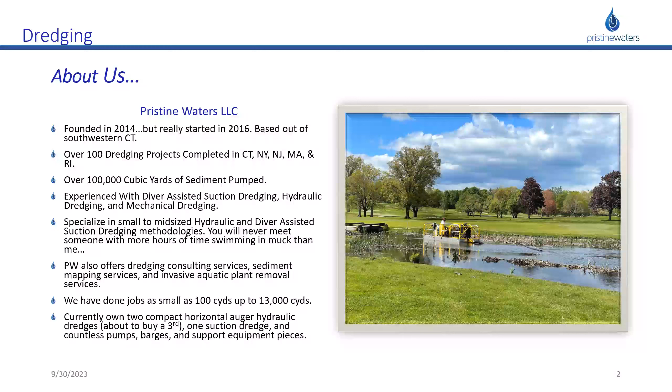One of the first things that people ask when they call to inquire about dredging is how expensive that service is going to be, and ultimately the answer is always the same, which is that we cannot possibly tell you without information, and generally speaking, without seeing the body of water we're being asked to dredge. Some of the components that go into determining the proper methodology come down to things like, what type of sediment are we talking about? Is it sand, or is it organic material, decaying plant matter, leaves, algae, so on and so forth?

Other things that come up in this process: is the sediment tainted? That will change the disposal cost, and again, the methodology by which we dredge it. We generally don't send our divers into toxic environments for obvious reasons. In situations like that, we would steer you towards hydraulic dredging. Other questions are things like, how far do we have to move the sediment once it comes out of the water? Is there ample staging space around the area that's being dredged? And if not, where is that area? How accessible is the pond or lake to get equipment to?

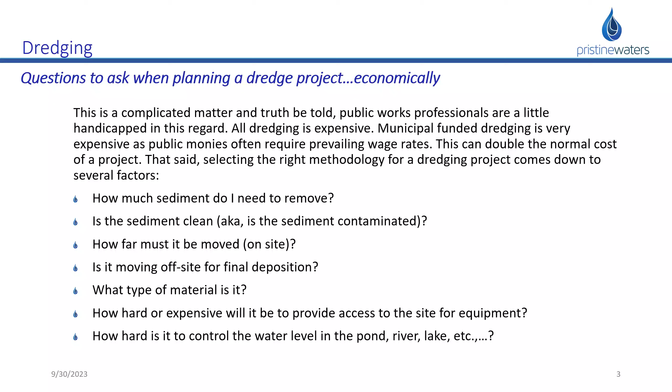So the idea of access is really important when you're looking at what kind of dredging is going to be done. And then finally, how easy is it to control the water level in the body of water you're looking to dredge? These items all contribute substantially to the cost of a dredging project.

So dredging, there's really three types of dredging primarily. There's mechanical dredging, which is kind of the old school excavator in a pond, scooping out sediment, shovel by shovel, and putting it on the ground, and then that material drying and being loaded up into a truck and driven away. That's something that's still done and is still appropriate for certain types of dredging projects.

Again, access is a big limiter, but beyond that, the other two methodologies that we're going to talk about briefly are less effective in dealing with consolidated materials like dense sand or big chunky rock. Those kinds of things are still best left to an excavator.

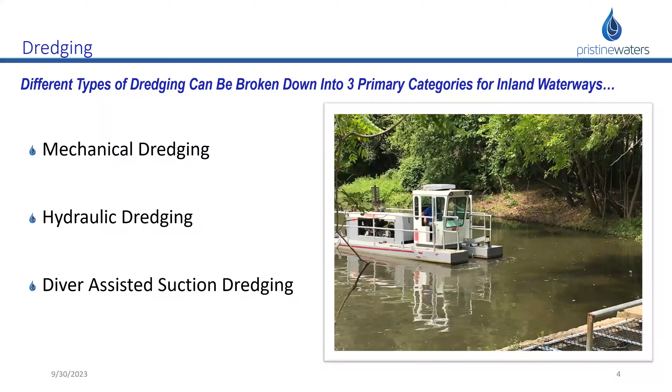In the picture you see there is one of the dredges that we've used, although not in a couple of years. We actually no longer have this dredge in our fleet, but that's an example of a horizontal auger dredge being operated with a pond being completely full of water. So mechanical dredging, I already explained.

Hydraulic dredging is essentially a steel catamaran. A hydraulic dredge, or at least a horizontal auger hydraulic dredge, is a steel catamaran with a boom that goes down and an auger head at the end. It agitates the sediment that's laying at the bottom of the lake and mixes it with water inside of a shroud.

Right behind that is a big pump, and that pump is sucking what's called a slurry, that mixture of water and sediment, out through the pump, through the boom that is being used to lower the auger head, and then into a pipeline that carries all of the sediment suspended in the water back to shore.

Similarly, diver-assisted suction dredging is essentially the same basic idea, except it's done by hand with divers who are supplied air from a topside air compressor, so they can go down and hand excavate sediment.

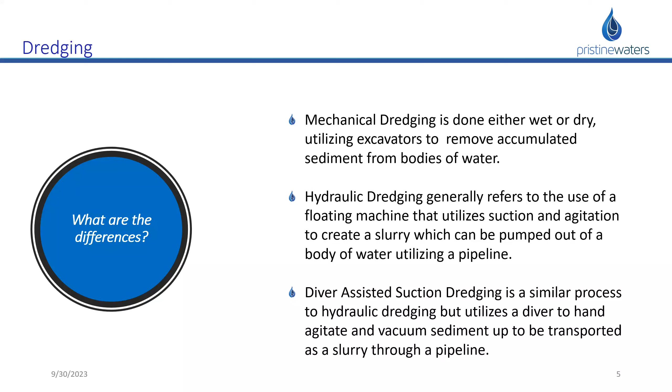So this is about mechanical dredging. It's really very effective on small bodies of water that are kind of self-contained. Any place where you have good access from around the perimeter of the pond, or even a lakefront, if there's access to get a machine down that's substantial enough to do the work that needs to be done, mechanical dredging is still a very viable option.

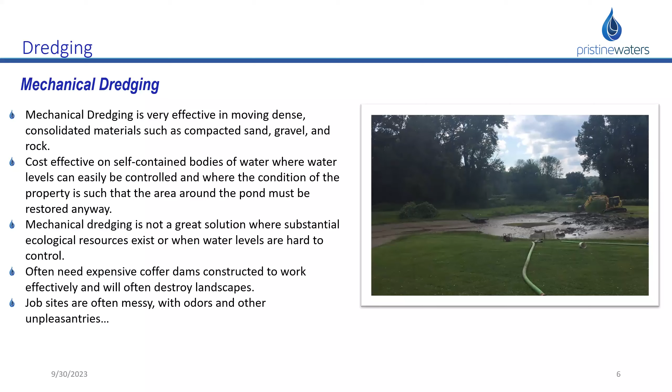Going back to hydraulic dredging, it is super effective in moving soft and moderately compacted material. So that's going to encompass the vast bulk of the sediments most lakes have at the bottom in the Northeast. It's not absolutely true all the time.

Sometimes you have heavy sand loads, and sometimes you can have clay, which is also more challenging to dredge with a hydraulic dredge. But even those two types of sediment can be dredged using a hydraulic dredge. It's just not nearly as efficient in doing so.

From a cost perspective, hydraulic dredging tends to be very effective and very cost effective when you start getting up into the thousands of cubic yards of material. In the hundreds, I think you're probably better off looking at mechanical dredging or diver-assisted suction dredging.

But when you get to a certain volume that justifies the cost of moving the equipment and placing the equipment in the lake and so on and so forth, and the setup that's required in connecting the pipeline and the geotextile tubes, it starts to become a more cost-effective option. It's good at preserving habitat, merely because you're not sucking all of the water that these organisms depend on out of a pond or a lake.

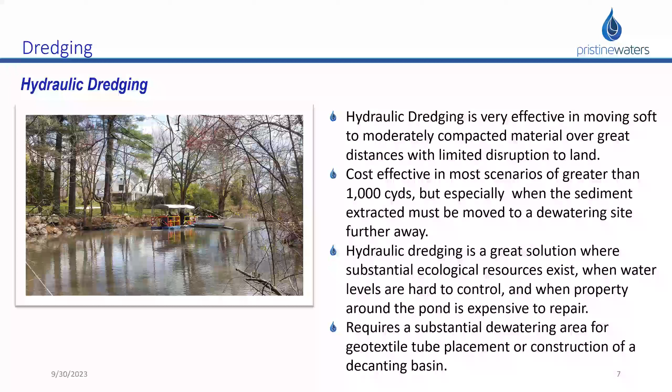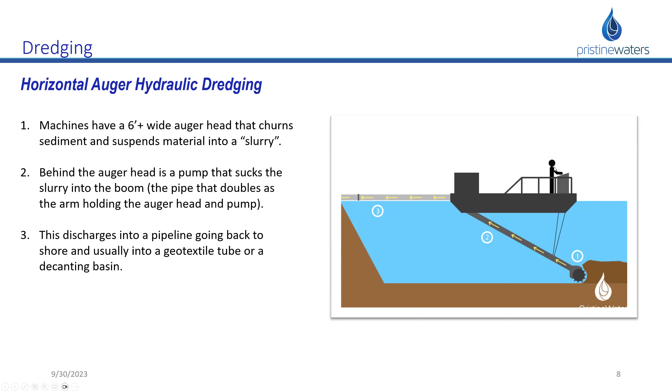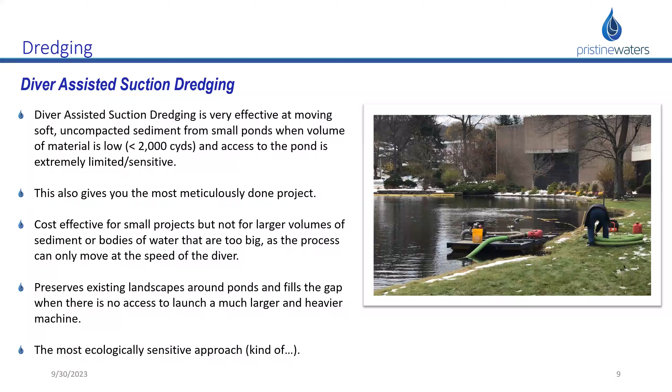So this is a cross section of what diver-assisted suction dredging actually is. So here we have the pumping barge. We have a diver with a hose with a nozzle at the end, swimming up to a wall of organic sediment. And essentially, this was part of an animation that I showed at the last meeting that I attended with you guys. But essentially, the diver's taking chunks of that sediment, that organic muck, out of the water column and just kind of proceeding through. And it's kind of a game of underwater Pac-Man, if you will.

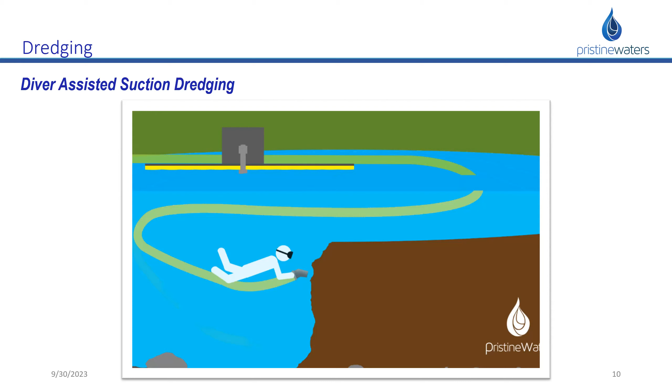So I've mentioned dewatering a couple times. Dewatering from a mechanical dredging perspective is as simple as scooping up the material, turning the excavator around, placing it on land, somewhere for the water to run off and the sediment to dry. When we do it hydraulically or with diver-assisted suction dredging, we use what's called a geotextile tube. I'll have more details on that, but this is very typical of what the dewatering area on a given project might look like.

So one of the requirements with a geotextile tube is that it's placed on flat land. And when I say flat, I mean very flat, because as you can see, these are tubes. And they can potentially roll and or shift with all that water in there, and sediment kind of moving around. If you want to try to picture a toy water snake from when you were a child, these things do like to shift. So having them on flat ground is very important. But then underneath the geotextile tubes is typically a liner. In this case, it's a 6 millimeter reinforced polyethylene liner.

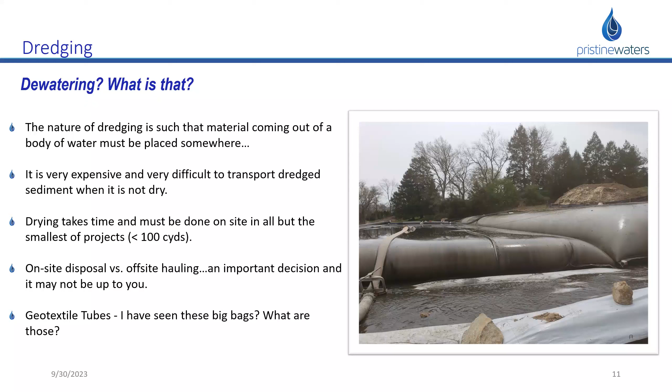The tubes can be sized in custom sizes, circumferences or widths. This is a detail of what the cross section of that dewatering plant that we were just looking at basically looks like. Essentially, we raise the edges around these tubes to create a berm, but think of it as like a small, temporary above ground swimming pool that we place the tube in.

So when we pump the material and the water, the slurry, into the tube, as it settles and the solids go to the bottom and the water stays above that, it has the opportunity to kind of leak out through the perforations in the weave of the geotextile fabric. It'll filter down particles to about 100 microns, and then after that, you're talking about super fine particles, which will be pumped back into the lake and or pond as part of that return water. The reaccumulation from a volumetric perspective is nominal on superfines.

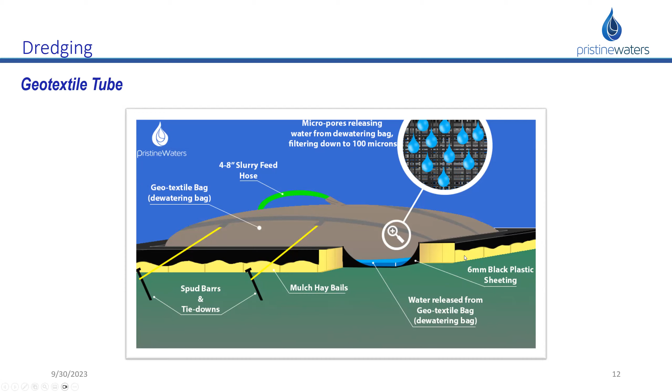However, you do have that turbid water. For that, they make chemicals that can settle those superfines in the tubes to release cleaner water. You can get it down to potable water using the right flocculants, which again are these chemicals, which are in some cases safe, very safe. In other cases, less safe, and in the last case scenario, not really safe to be drinking. But those are rarely used. So you see, in most cases, we use hay bales or an earthen berm. We drape the liner over that to create that, and then the water is directed back.

So that's my little presentation on dredging, but really focused in on the hydraulic and the diver-assisted suction. If anybody has any questions, I'm happy to answer them now, or my contact information is included in the presentation.

I see the last question. Hey, Mark, can you hear us? I sure can. Okay. I'll repeat it to him. Using those tubes that he was just describing, how long does it take for the dewatering process? So Mark, we were wondering how long it takes a tube to dewater.

Sure. So the first thing is you have to think about the fact that it's constantly dewatering during the pumping process. But there's two types of dewatering. There's the ancillary pump water that is used as transport media to carry the solids in the pipeline. That dewaters pretty rapidly. The moisture within the organic material takes a bit longer to dry out and get out of the tube. That material and that water dries at a fairly reasonable rate. However, it depends on the ambient environmental conditions that it's in.